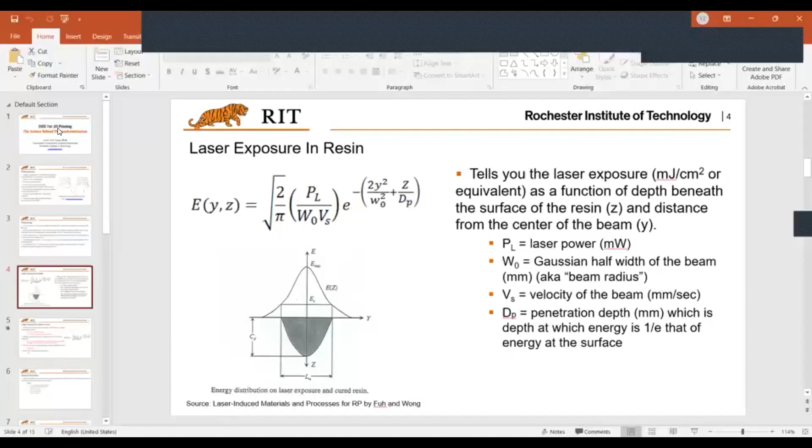So we talked about some of the fundamental chemistry beneath the photopolymerization process. What essentially happens during the process is the polymer becomes cross-linked after the light is applied to the resin during the process. That's a unique property. Basically, thermoplastics are not cross-linked, so thermoplastic material cannot be used in this process.

As I mentioned, this cross-linking happens during the process, and there has to be a light source. That is very important to look at in this photocuring reaction. Basically, that is the process of hardening a liquid resin through a laser or other light source selectively applied to the resin. There are a few parameters that need to be considered.

First is the penetration depth. Basically, that is the depth beneath the liquid surface at which the energy intensity has been reduced to approximately, actually it's 1 over the exponential number, I mean Euler's number, 1 over E. Here you can roughly use 1/3, since Euler's number is 2.7 something. But you should know it's actually Euler's number, 1 over E.

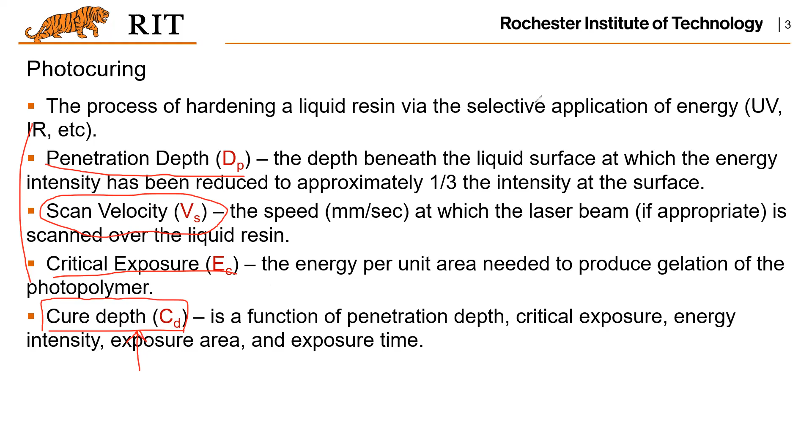Now we have this equation here, and basically PL is the laser power, and W0 is this Gaussian half width of the beam. As you can see here, that represents the beam radius. And this E(Y,Z) is the laser exposure. Basically, its unit is millijoule per square centimeter or some other equivalent unit.

But overall, it's the laser exposure. And this laser exposure is a function of the depth beneath the surface of the resin and the distance from the center of the beam. As you can see here, this can be considered the center of the beam, and you will have different energy at all these points. And also it depends on how close this point is from the surface of the resin.

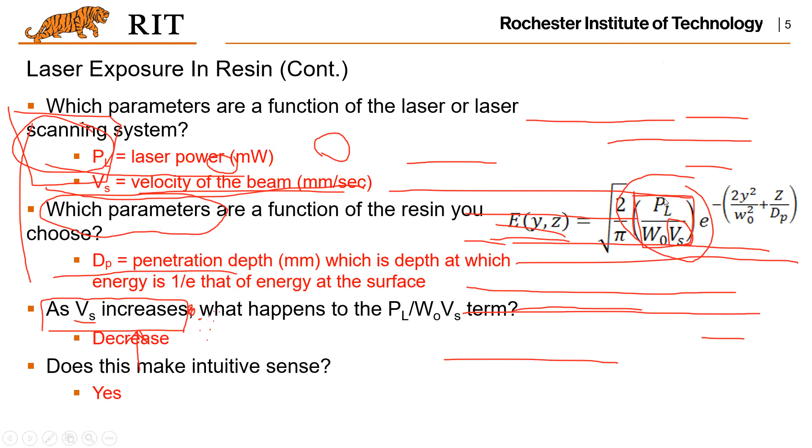Another interesting question is something like this: if we have all those parameters given, and there's a question asking what is the laser exposure, which is E(Y,Z), at a depth of 0.05 millimeter and a lateral distance of 0.03 millimeter from the center of the beam. That means, if you have the figure, that is the distance from that point to this vertical axis.

And with all this, how do you compute this laser exposure? What you want to do is first have the equation and plug in all these known variables, and then you should be able to find the laser exposure. For example, you have the laser power, right? That's where the laser power is placed. And also W0, VS, and DP. I think DP is something here, right? And so on, and it turns out you can compute the number like this. Basically, it's simply substituting the known parameters into the equation, and then you should be able to find out those numbers.

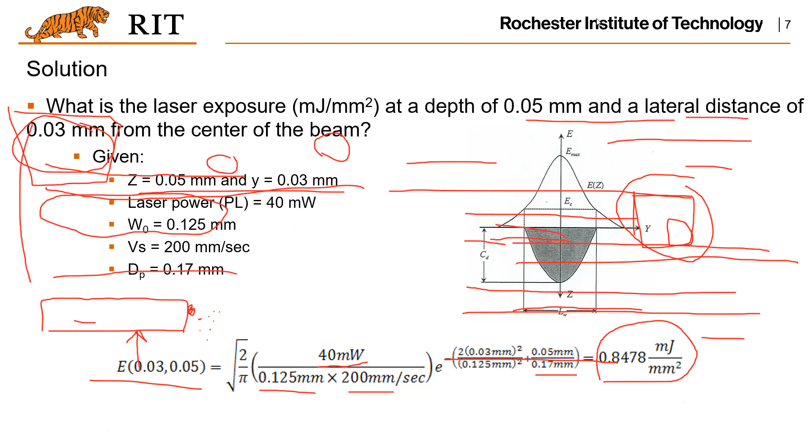Yeah, go ahead, I have a question. In the case of the supports, supposedly I understand - no? I don't know if it's correct, you can correct me. Can that energy intensity be manipulated? For example, if I need that my supports don't need to cure a lot, but my solid part, yes - is that the intention for this equation, or not?

Well, I think that's a good question. I don't know whether the providers of the printers manipulate the power, but that's possible. But one thing you want to be aware of is the support will still do the job - that means it supports the main part, and there will be a load applied to the support. If this curing is weaker than the one for the main part, whether it could bear the same amount of load without collapse, that will be the essential question you want to look at. Probably I think they will not afford this risk. So instead, they just use the same intensity, the same laser energy, and cure it as strong as the part. I think that's my guess - I didn't check it, but that's interesting to look at.

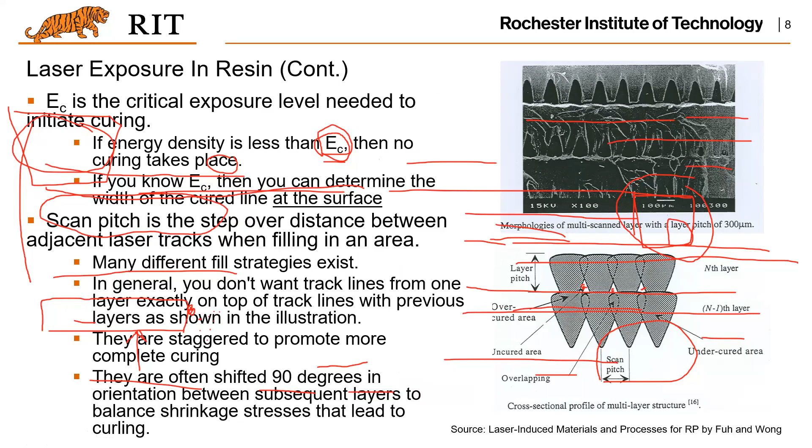If you know the critical exposure here, you could determine the width of the cured line at the surface. If we look at the figure... basically, if you know what is the critical exposure, you can tell what is the width of the cured region at the surface. So that could be computed.

All right, let's move on.

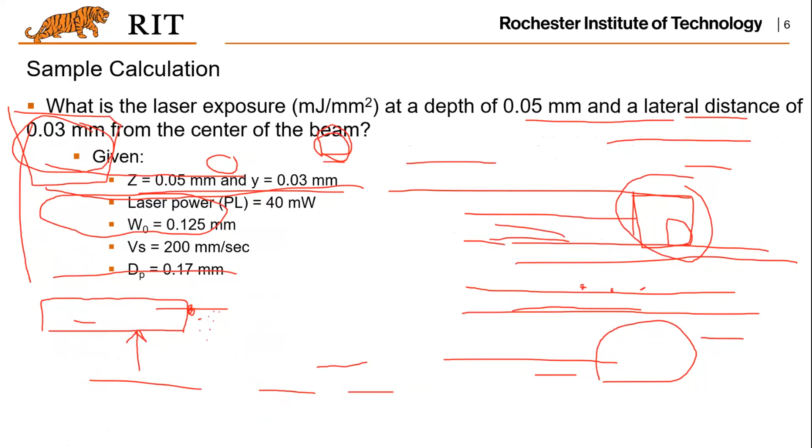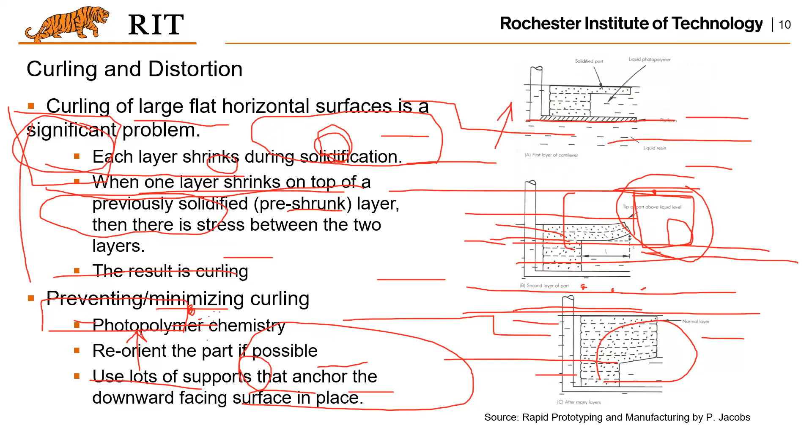Such curling could be removed, and also you could change your design a little bit to prevent designing such features on the geometry of your part. So all these are possible solutions for preventing the curling of your prints.

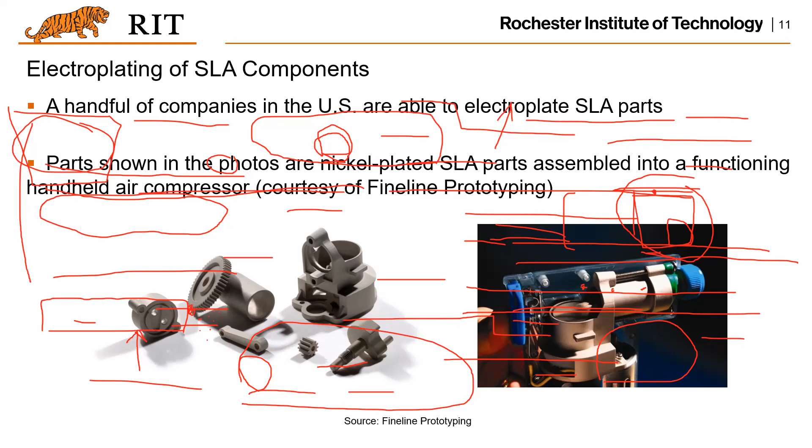For the printed parts, again, there are post-processings which could introduce other appearance and functions to the printed part. For example, like the electroplating process - basically, you could add on a thin layer of metal onto the polymer parts right after the process. Here shows some examples, and basically that will serve certain functions in certain applications.

I would like to skip this. Basically, those are the steps for the plating of the plastic.

For many of those electroplating processes, what you want to do is charge your plastic part and make it available for the metal particles with the electro charges applied, and then you can start with other steps to do the plating.

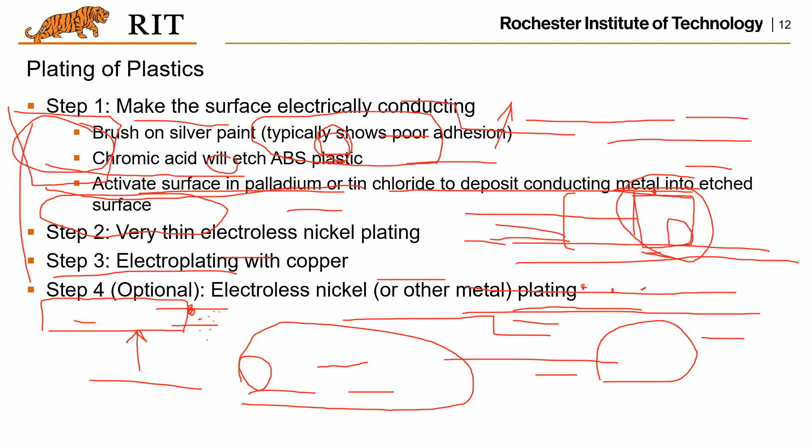Okay, another interesting application is Invisalign. I think I introduced this in the beginning of the class, and it's a very successful business based on the stereolithography process.

The key here is to create a series of teeth between the original teeth of the patient and the patient's desired teeth, with transitions in between, usually 12 to 48 aligners. Each aligner is worn for about 6 weeks, and all these aligners need to be fabricated first by 3D printing a model of the teeth, then thermoforming to generate the aligner based on the printed teeth.

The material is polycarbonate or polyurethane. Basically you want a very thin layer of this material, and at the same time its strength should be good enough for the purpose of aligning the teeth.

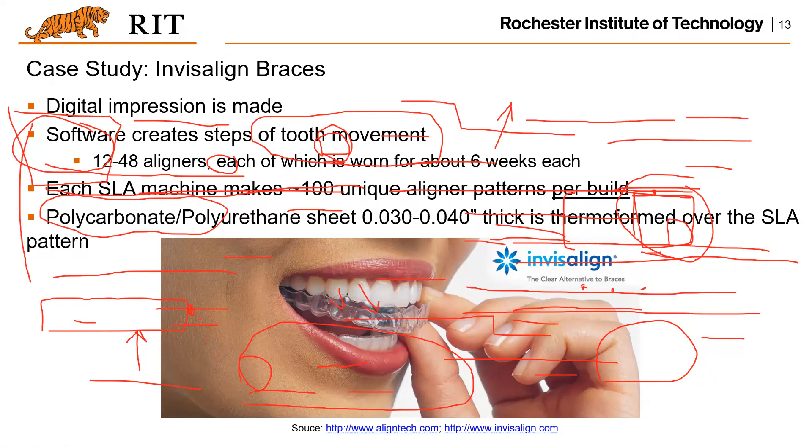Yeah, okay, I could show you how it looked like. I know it's a little annoying to have all those annotations on, but let me copy the link and open it in a different browser, just one second. Let me share this website instead so you won't have the annoying annotations.

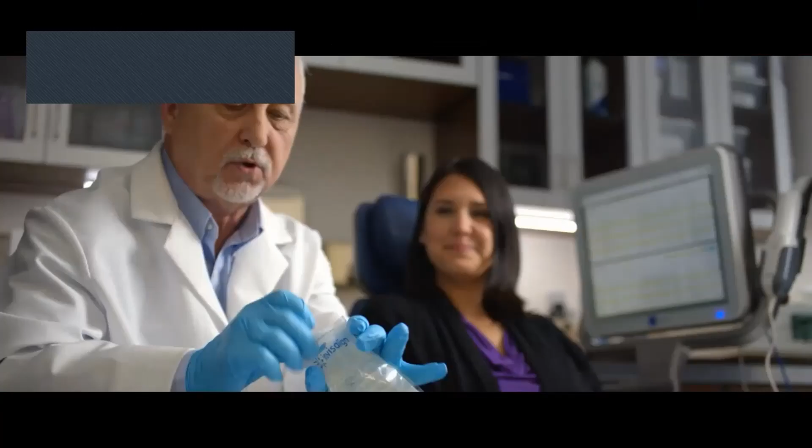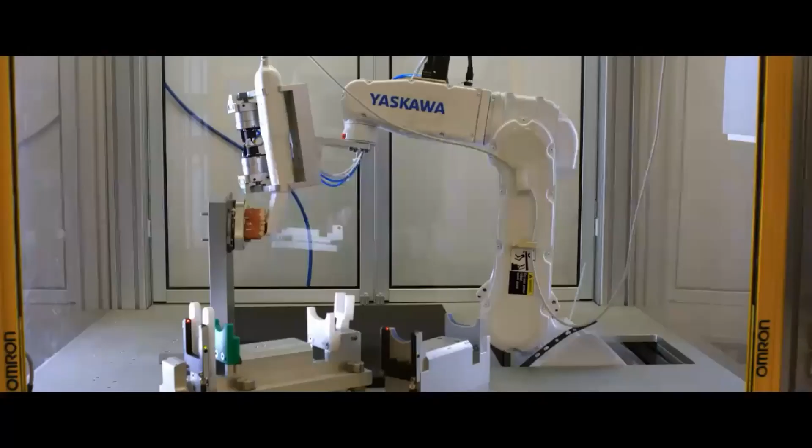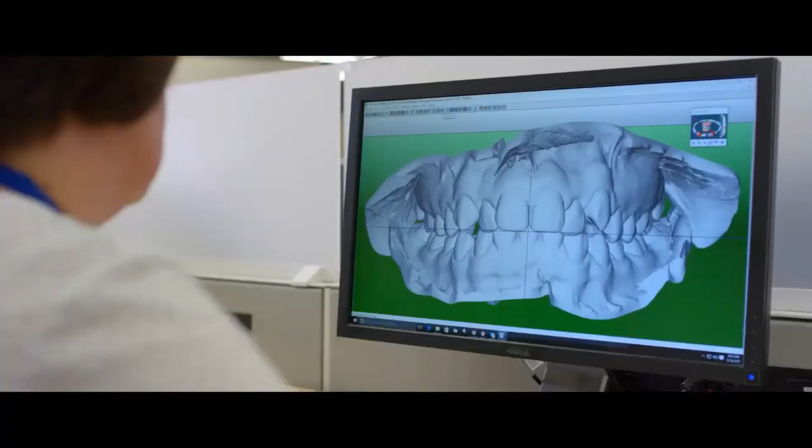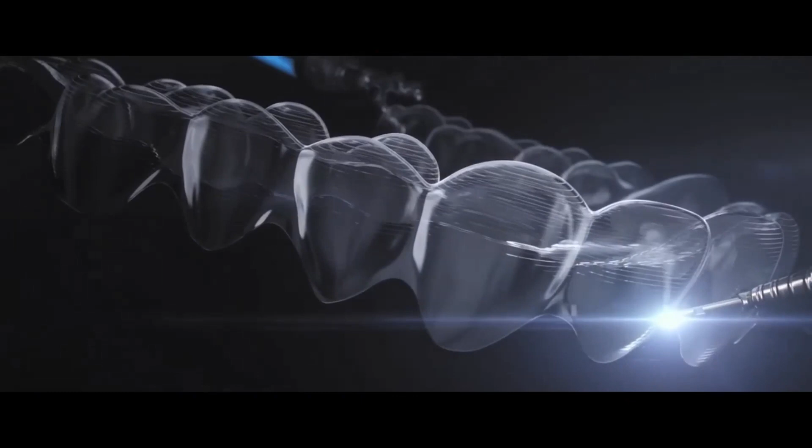The idea of mass customization is really the basis of the company's existence. The idea that sparked the whole thing was: can we use digital technologies to bring the science of teeth straightening into the next generation? When Invisalign started, 3D printing was primarily used for prototyping a limited number of parts, so we had to figure out how to make that into a production process. 3D printing is really the foundation of our manufacturing process - it's the starting point. When we make a mold for every stage of a patient's treatment, we use 3D printing to make those molds. Think about injection molding, where you're only producing the same type of part, millions of those - that's been done before. Or think about a specialty 3D printing application, where each part is unique but produced in small quantity. What we've done at Align is combine those two. We've treated almost 6 million patients, and growth is accelerating. We produce about 320,000 parts every day. 3D Systems has been instrumental in helping us get to where we are today. What makes Align's mass customization so unique is not only are we producing millions of parts every month, but each part we produce is unique. This is really, as far as I know, the only true example of mass production using 3D printing.

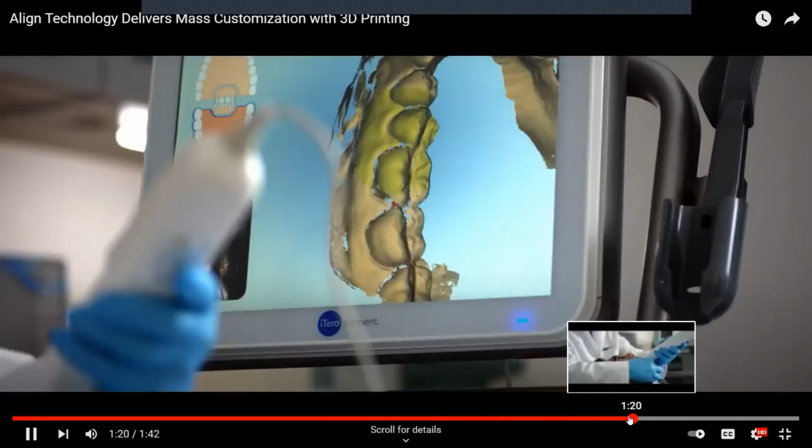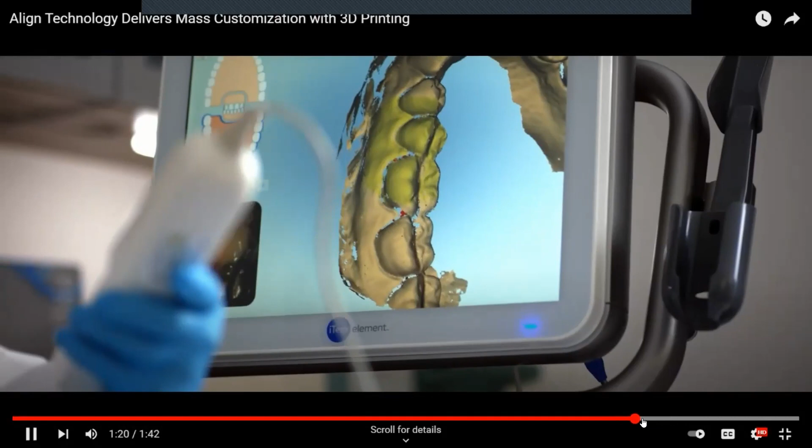I'm trying to find out where this was thermal formed, but apparently it didn't show in the video. So do you all know what thermal forming is, right, or not?

Yes, of course. How about others? No, not really. Okay, let me show you the thermal forming, what thermal forming does, so that you will understand what I'm talking about.

Thermal forming, like... but the problem is the video is confusing because they show it in a certain way - that's the marketing strategy. Yeah, that's why there are questions.

Oh, you are actually - let me see. Oh, it's a little off. Instead of finding the teeth application specifically, let me just find some general thermal forming examples. Okay, let's say this one. It's a little too long.

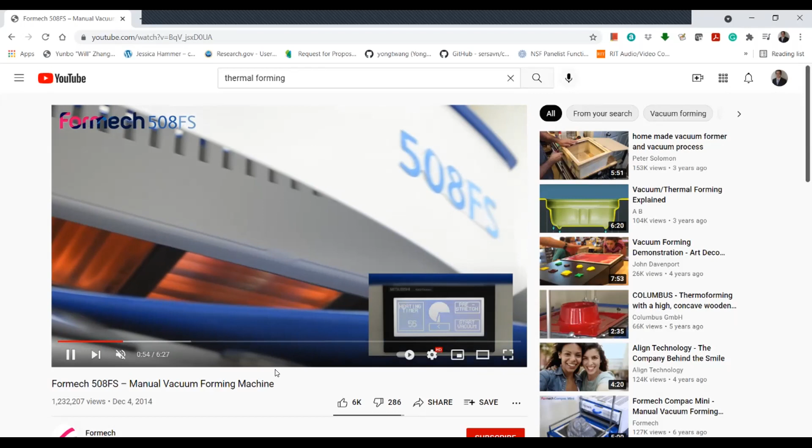All right, and then another step: the mold is moved towards the sheet, and there will be a vacuum machine to remove the air in between the sheet and the form. And it turns out you will have the part created. So basically, if you talk about plastic boxes for cookies that you will always see in the grocery stores, that is made using such a process. So you have the mold, you have the sheet, and through this process, you will have all the parts with the geometry created like this.

See, right? So in the Invisalign case, what it prints is the teeth as the mold, and then the polycarbonate plastic sheet will be fabricated and applied to the mold, just like this, to create a thin sheet of the aligner. You got it now? So just remember, it's not directly printing the aligner. It's the printing of the teeth and then a thermal forming to create the aligner.

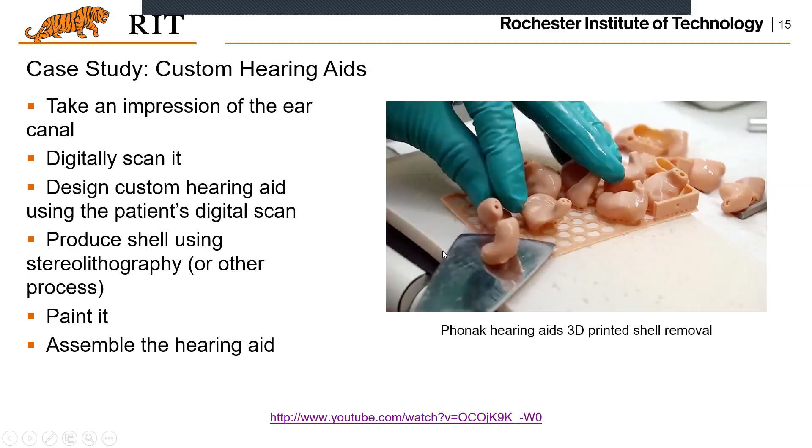Let's look at a video maybe. Just one second, let me share it.

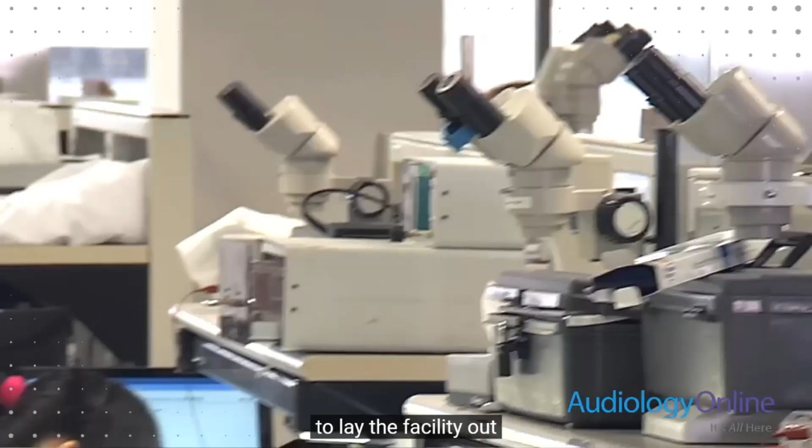Well, at Oticon, we've recently moved into a brand new 162,000 square foot facility. And the beauty is that we were able to do that and design it based on our 100 years of product design and manufacturing experience. So we were able to lay the facility out, taking advantage of that to optimize productivity and efficiency and really streamline the workflow. In addition, this expansion has allowed us growth for the future. We were able to put the infrastructure in place to keep pace with the growing demand. It also enabled us to increase and upgrade all of our manufacturing equipment.

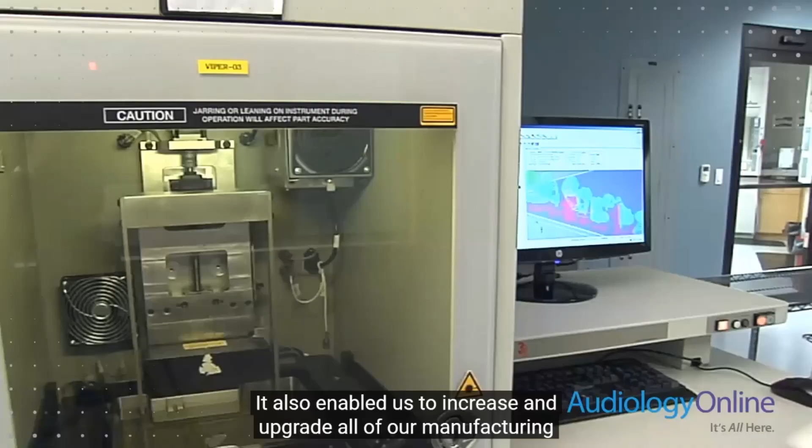And part of that manufacturing equipment consists of the SLA process. For those that don't know what SLA is, it's called stereolithography apparatus. It's kind of a tongue twister. But what it means is really a great ability to take advantage of new technology to create shells. We're able to double capacity and at the same time make a much more cosmetically attractive, smoother finish, comfortable fit product for the custom side of the business.

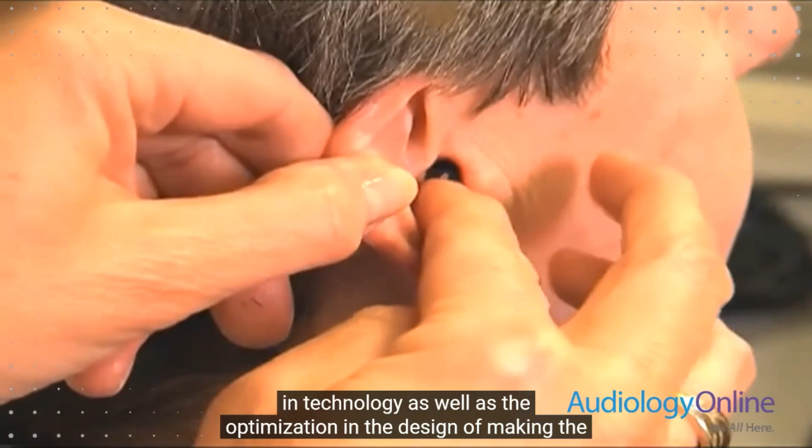Oticon produces a variety of BTE instruments and custom instruments to the marketplace. With the introduction of the Invisible in the Canal product Agil, there is a growing custom product demand out there. With today's advances in technology, as well as the optimization in the design of making the product, we can make it smaller, comfortable fit, and the hearing care professional can fit a wide variety of hearing losses.

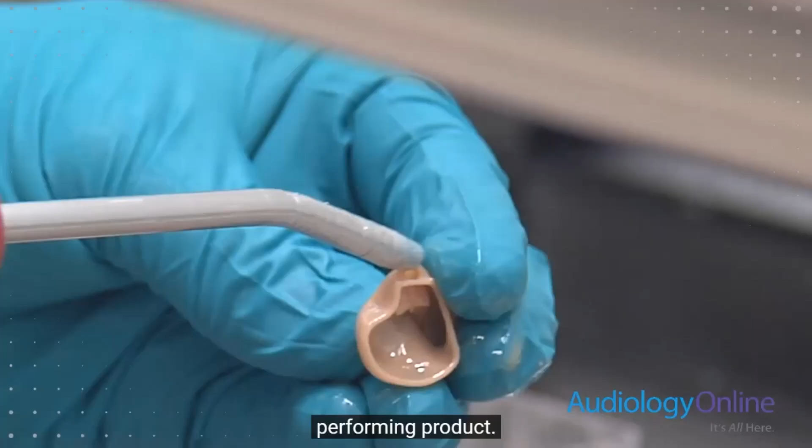And it goes beyond technology. Just because you have technology will not ensure you have a good performing product. It takes people, and people are a key foundation within Oticon. So it's a combination of the technology and how to use it, using the people, using their understanding of what's important to make a good product. Put those two together, that's called success. I think it's important for the hearing care professional to understand, with this new technology, they still have a key role to play in the quality of the impression that they provide.

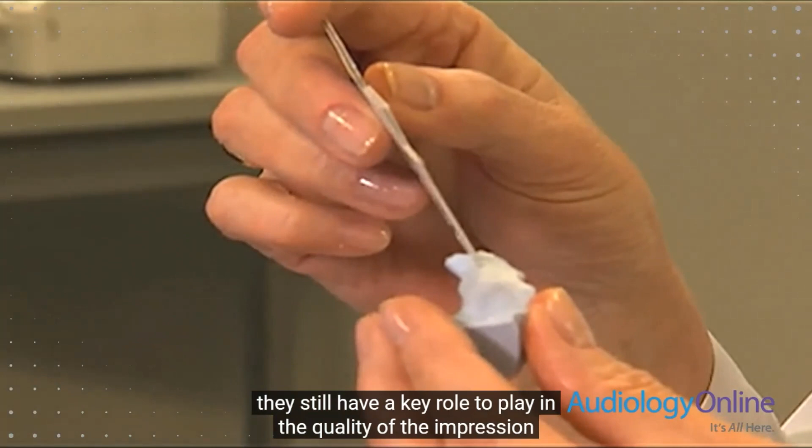What does it take to make a good quality product from an impression? It's really fairly simple - it's about consistency. When an impression comes in, does it go beyond the second bend? Ideally 2 millimeters beyond the second bend, full canal. Use that otoblock so we can get a full, good size impression including the concha, because the concha is also very important for a manufacturer since that determines our locking points.

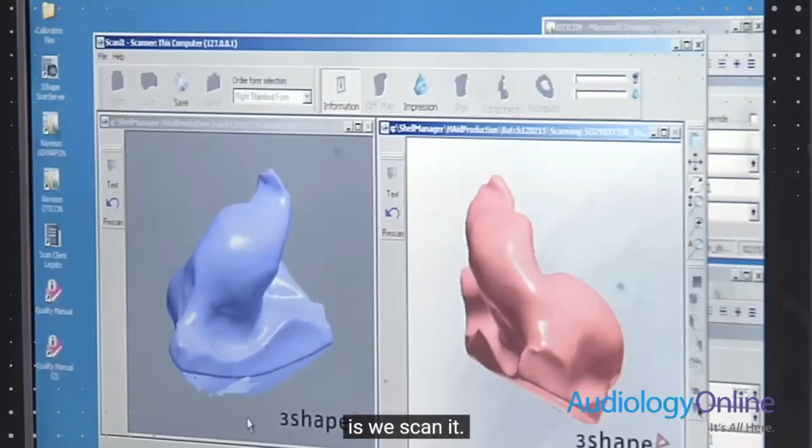Once we get that impression, the process we go through is we scan it. When I say scan, through 2 cameras we make what's called a digital point cloud - roughly 100,000 measurements in 2 to 3 minutes. So we create an exact replica of the impression that we get in. After scanning, we create a 3D image of that impression, again an exact replica.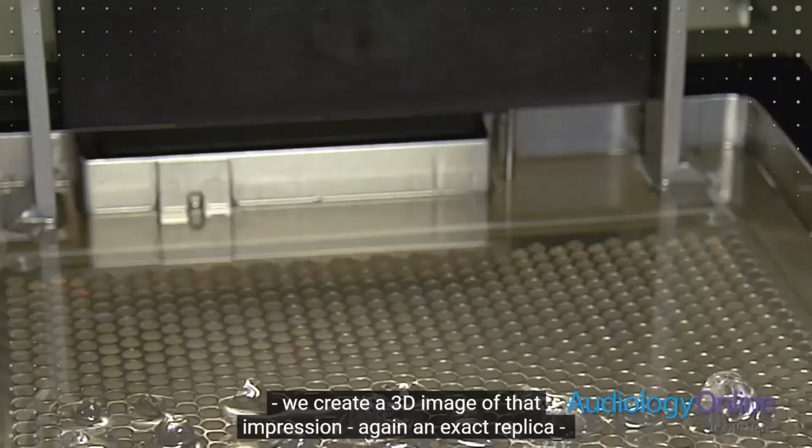Now we print it, using new technology. That new technology makes it very consistent - we can have a very consistent product. So again, it's incumbent that we get a good quality impression.

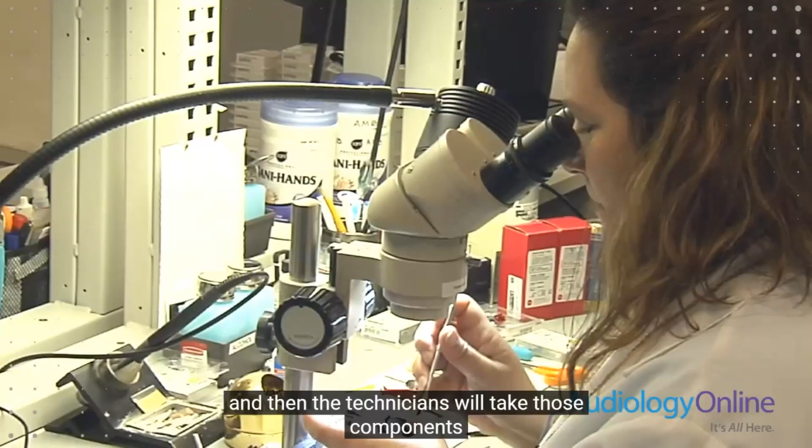If we have that, it goes through the process of shell making, it goes to our assembly floor, and then the technicians will take those components and put them into the product for something that's consistent, comfortable, and as small a size as possible. So hopefully when you open that box, when you get that delivery, not only are you happy, but your patient will be happy as well. The question that comes up is what happens if we don't have a good impression?

I think we can stop here, but that video presents how this kind of stereolithography process helps the manufacturing of hearing aids.

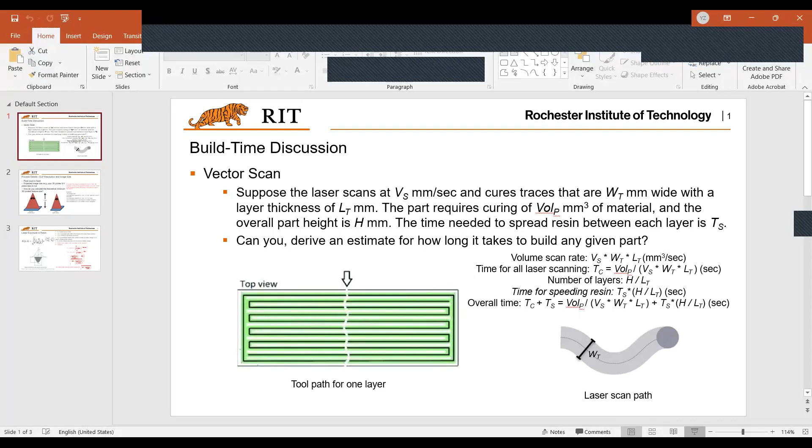One question is related to vector scan based stereolithography. Let's assume the laser scan has a VS millimeter per second velocity, the cure trace has a WT width, and the layer thickness is LT millimeter. We are required to cure this volume of material, and the overall part height is H millimeter. Let's estimate what the overall building time will be. By the way, there is a time TS required between each of the layers. Knowing all this, let's estimate the overall time used for building the part.

I've talked about this a little bit during the class. There are two sets of time: one is the laser scanning time, and the other is the time for spreading the resin, which is what TS represents - the time for spreading the resin between the two layers. We need to compute both sets of time and put them together.

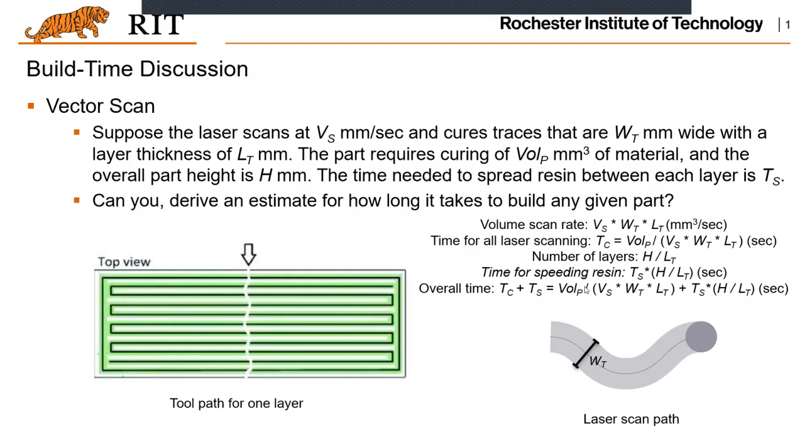Another one I mentioned a little bit during the lectures, I mean 2 weeks ago - that is, if you have the projection-based image for the projection-based process with the image resolution, you could decide what the minimum 3D printed feature size is.

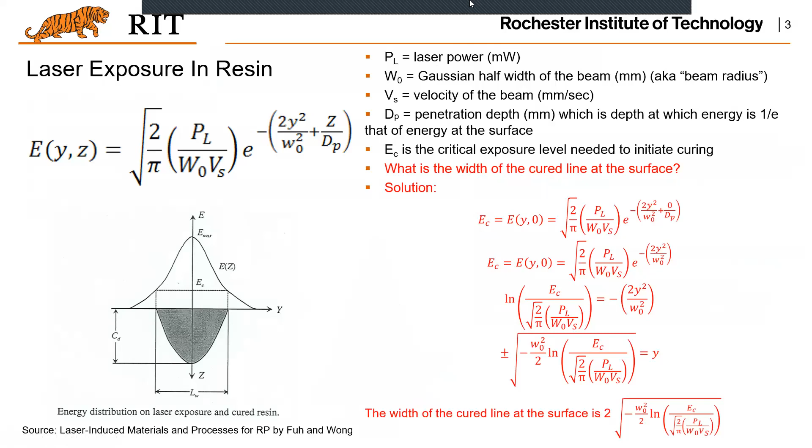All right, then we have this kind of question, basically that's related to the laser exposure in the resin. And the key is this equation, that is the Gaussian equation you want to use. Let me move it somewhere, maybe here. And again, it depends on what kind of known information you will have.

For example, there's one question to compute the width of the cured line at the surface. So that is asking you to find the dimension of this. It turns out it happens at the surface, that means the z number is 0, because this axis is y and this axis is z, and at the surface the z should be 0.

Then what you could do is substitute 0 here, and now you have what is the laser exposure, and then you will have this number. Okay, all right.

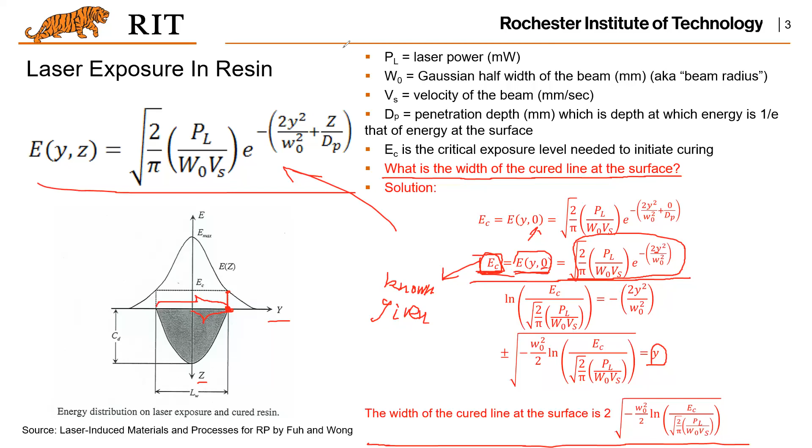Okay, I think we can move on and talk about another process, just a start. All right, that's lecture 9.

So let's talk about the selective laser sintering process. So what it looked like, let's check the video.

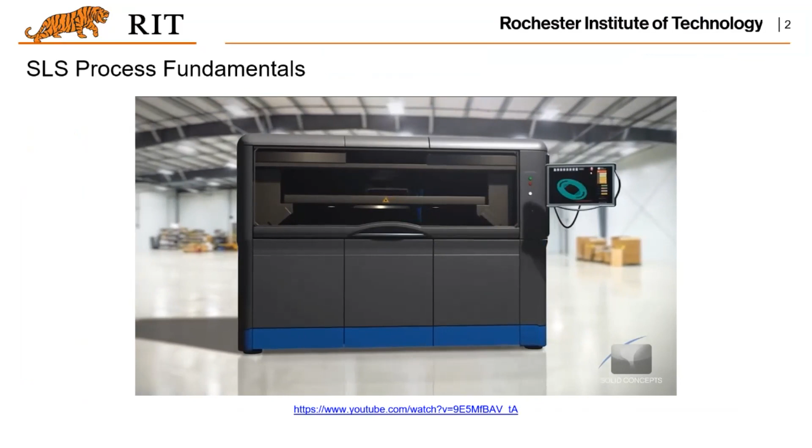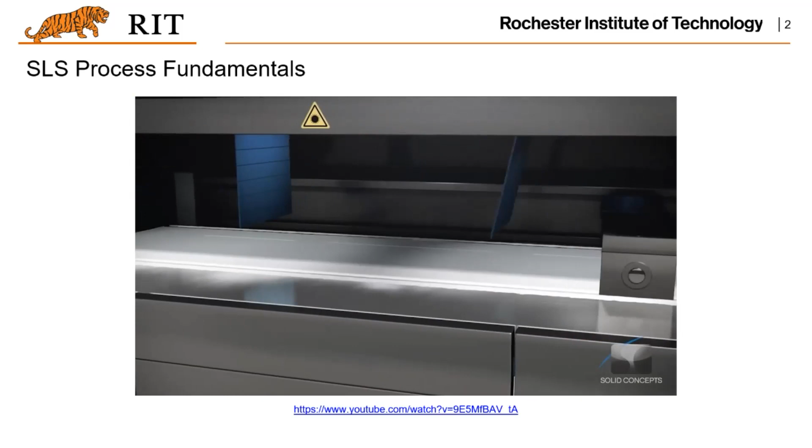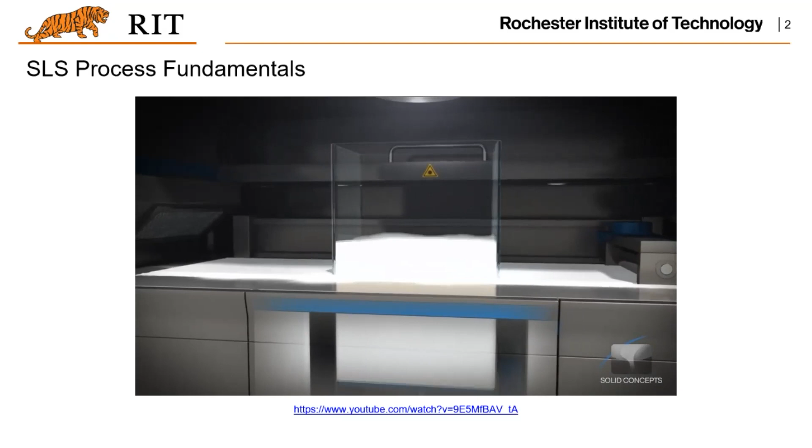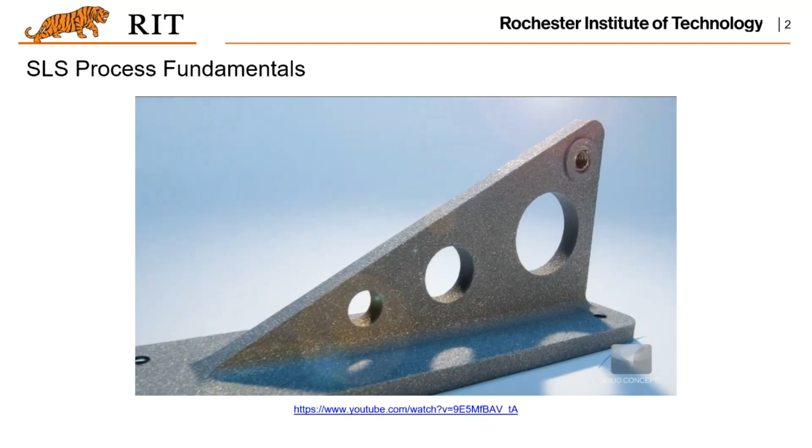Selective laser sintering, or SLS, is a rapid prototyping technology that turns 3D CAD data into physical parts in a matter of hours. SLS is an additive manufacturing technology that uses powdered nylon 11, nylon 12, and PEEK materials. Parts produced are lightweight, highly durable, and both heat and chemical resistant, making SLS an excellent choice for producing production parts without the expense of tooling. The SLS process begins by splitting 3D CAD data into thin cross-sections or layers. The data is then transferred to the SLS additive manufacturing equipment. The machine then begins to create the first layer. After a leveling roller spreads a thin layer of powdered material across the powder bed, a CO2 laser traces the cross-section on the material. As the laser scans the surface, material is heated and fused together. Once a single layer is complete, the powder bed is lowered to make room for the next layer. More material is introduced from the powder cartridge and rolled out smooth, while unused material is recycled. The process is repeated, building layer upon layer until the part is complete. As SLS parts are built, they are encompassed by unsintered powder, which provides supplemental strength and eliminates the need for support structures. Complex designs and assemblies, once thought impossible, are now being redesigned with SLS as cost-effective integrated structures. Solid Concepts manufactures parts utilizing nylon with property-enhancing fillers to create rugged SLS parts suitable for a variety of prototype and production applications. Typical uses for SLS include tools and fixtures, fuel tanks, flight-rated components for unmanned aerial vehicles, automotive designs, air ducts, architectural models, and artistic sculptures.

All right, as you can see from the video, the SLS process consists of several key points. Essentially it hardens the powder, plastic powder, through selective laser energy.

And there's a roller which will spread a thin layer of thermoplastic powder onto the newly built part. Then the platform will move downward and repeat this scanning, hardening, and spreading of material, and lowering the platform again and again until the part is built.

So there's a unique point for this process: since during the building of the model, the object is buried in the plastic powder throughout the whole process, that means it does not require support material, right? Because the unsintered powder will support the build part. So that's a unique point for this process.

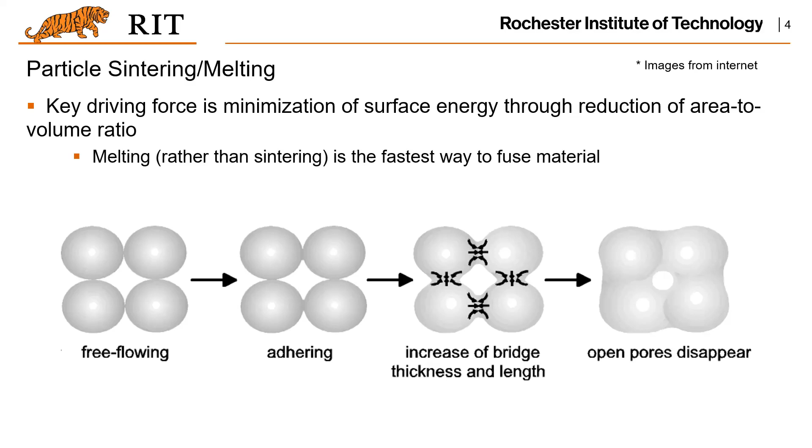There are different powder consolidation methods. There's solid state sintering, where there's basically no melting at all. And there are liquid phase ones, where of the two components, one melts and the other doesn't, or partially melts, so the bulk of the particle does not melt, just the skin melts. Or they are fully melting, which creates higher density, close to a full density process. If you fuse the particles more and more, that requires more energy, higher temperature, more strict processing conditions. So it depends on the material and the function you want the part to serve, and you could choose different ways for melting or sintering.

Since it's also a laser-based process, it has similar parameters. First is the laser power and spot size, scanning speed, which is quite similar to stereolithography. And there is hatch spacing, which represents the spacing between different scanned tracks, and layer thickness.

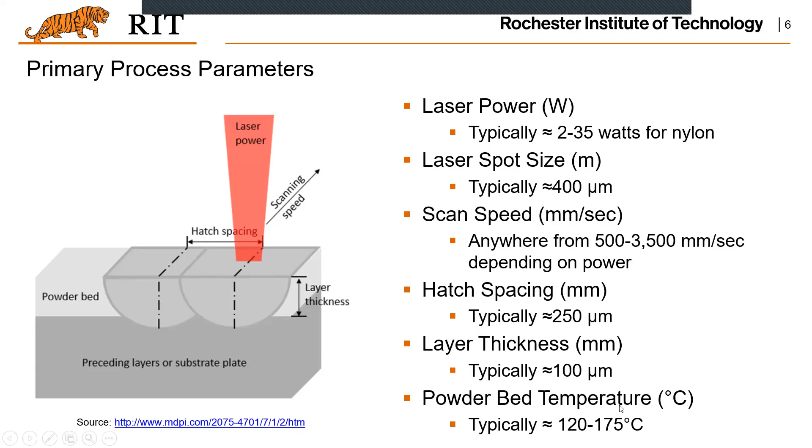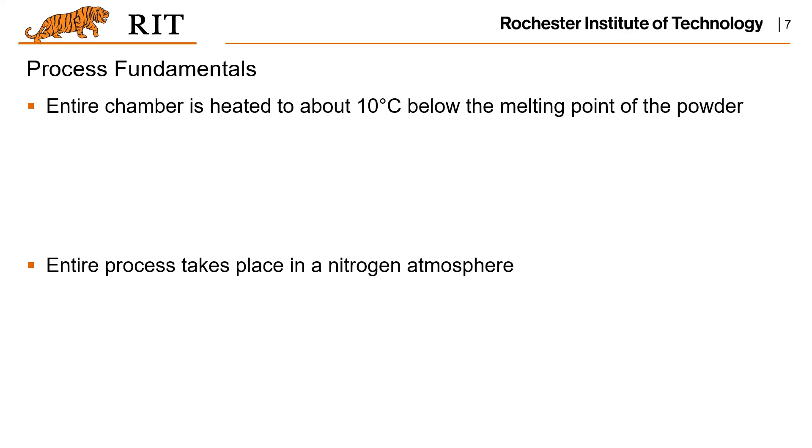During the process, the powder bed will be heated up to a certain temperature. Usually the entire chamber of the machine will be heated to about 10 degrees Celsius below the melting point of the powder. The reason is that this increases the laser scan speed. Basically, if the powder temperature is much lower than the melting point, it will consume more energy to be melted, so the laser has to be very slow to melt the powder. By heating up the chamber, that increases the scanning speed.

Another benefit is from the material property perspective: because the temperature difference is small, the built part will have less residual stress. So in order to reduce such residual stress, it is desired to heat up the whole part to a certain temperature, which is 10 degrees Celsius below the melting point.

Also, another requirement is a nitrogen atmosphere that will be filled in the chamber. The reason is, without such a nitrogen atmosphere, there could be some oxidation during the process for the nylon powder used. So to reduce such oxidation, the nitrogen atmosphere must be filled.

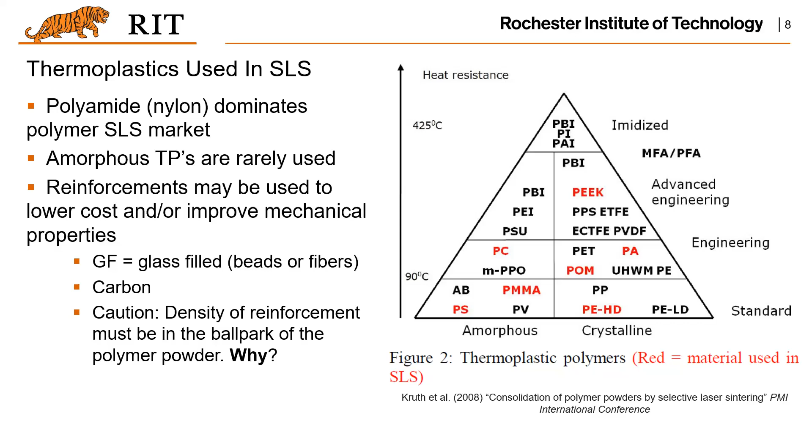So again, for the thermal process, we need to look at the temperature. For semi-crystalline or crystalline thermoplastics, there is a glass transition temperature, usually around or below room temperature. There will be a distinct melting point and subsequent flowing of material, and also a significant change in volume above the melting temperature. But for amorphous thermoplastics, there's no clear melting point.

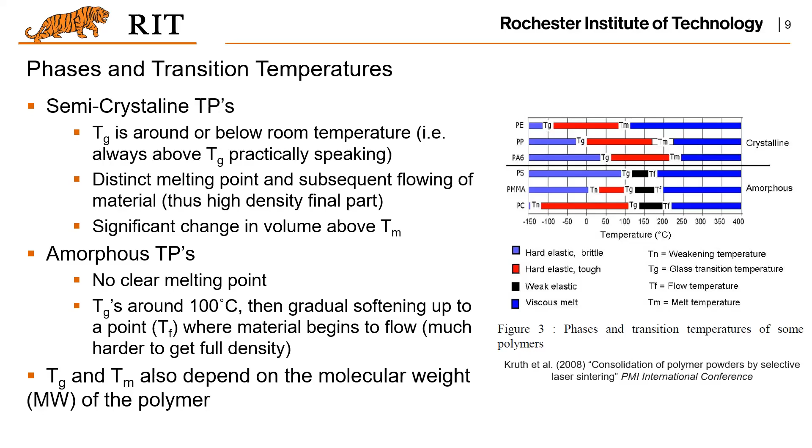The glass transition temperature for amorphous thermoplastics is around 100 degrees. It will gradually soften to another level where the material begins to flow, which is undesired for the printing process, since there's no clear melting point. That's hard to plan your process and build other parameters around. So that's another fundamental reason why crystalline or semi-crystalline thermoplastics are more desired in the process.

We have some equipment to measure thermal energy, like differential scanning calorimetry, DSC equipment, which measures the amount of heat needed to raise a certain amount of material to a certain temperature. By doing so, you have a clear understanding of the temperature and related thermal energy required, as shown by the curve at each point - the critical temperatures, like the melting point and glass transition temperature, and how much heat energy is required.

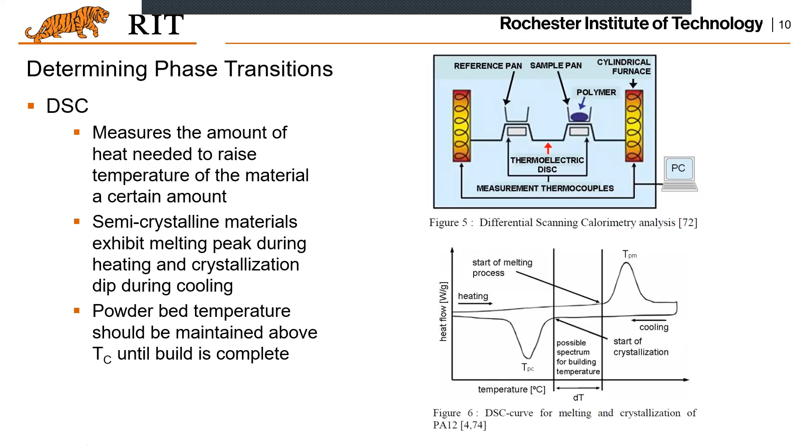In this process, the ideal polymer should have a narrow melting range, so it can go from no powder melting to complete melting within just a small increase in temperature. That makes this process easier to control - you just heat up the material a small amount to raise the temperature, and then complete the melting process. That's why we prefer PA12 over PA6 nylon material - looking at the melting range, the upper one is smaller compared to this one in this case.

Another phenomenon during the process is crystallization. The rate of polymer crystallization is at a minimum near the melting temperature and at a maximum in between the glass transition temperature and the melting temperature. That is related to the solidification process.

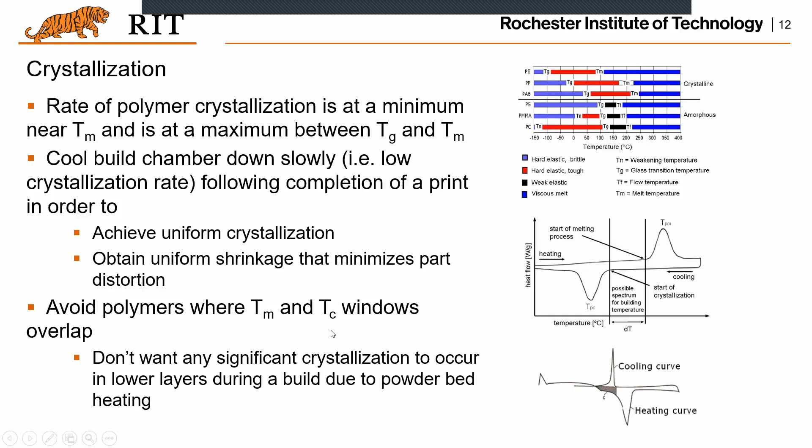Oh, it's not a glass transition window, it's the crystallization temperature.

Another one is the melt viscosity. After the material is heated up, it becomes a liquid state, and the viscosity of the polymer should be low enough to flow out to full density before the temperature falls below the melting point. That is related to the material itself, and low melt viscosity tends to produce high shrinkage, and essentially it will cause low part accuracy.

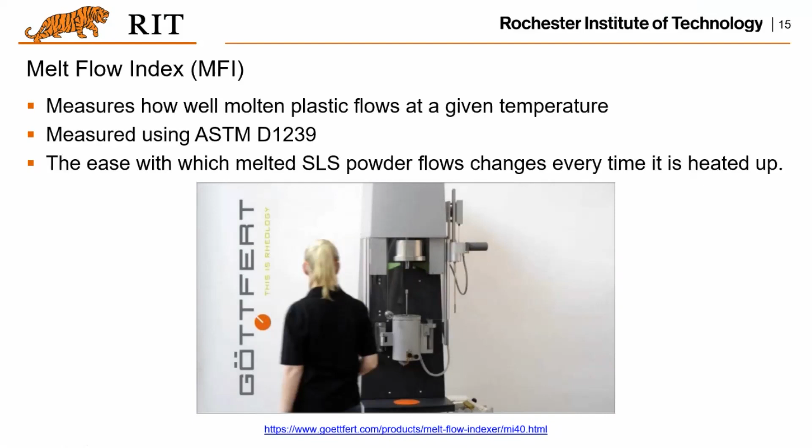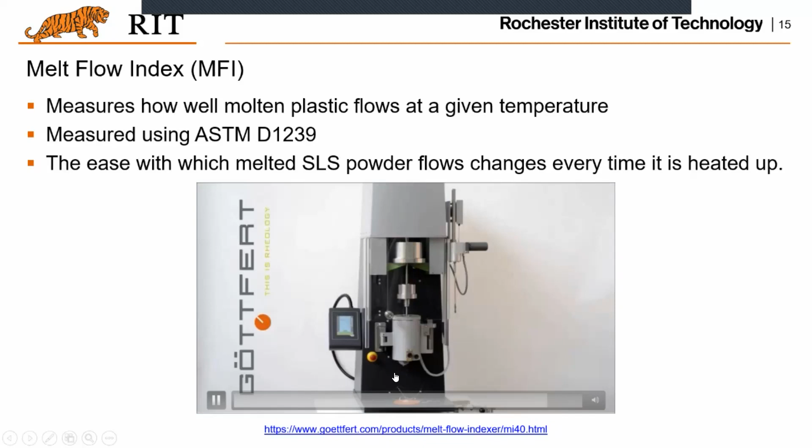So there is a way to determine the melting flow velocity if we conduct such a test. This is the melt flow index testing, measured using ASTM D1239. As you can see here, we have the pellet of the plastic, and it will be heated up in this device, then it will measure the molten plastic flows by setting up a certain temperature. At the bottom, it flows through small holes, and all the parameters will be recorded accordingly.

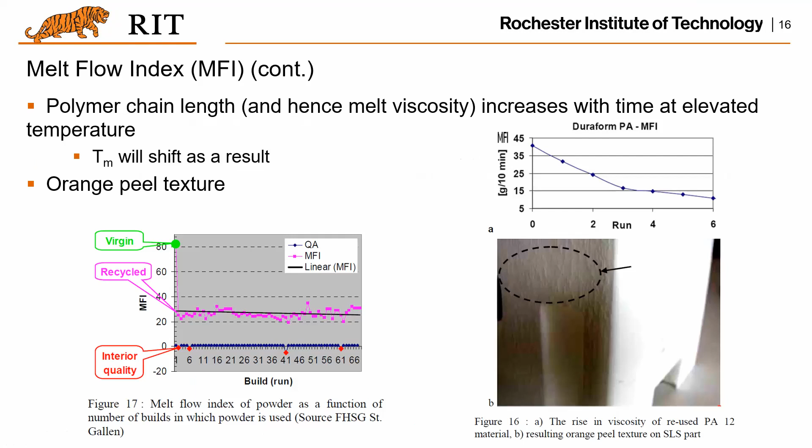So basically, the polymer chain length will increase with time at an elevated temperature, and that will cause a different melting flow velocity.

Another interesting property you want to look at is powder reuse and recycling. As you saw in the video, only a portion of the plastic powder is used, solidified during the process, and all the rest is still in powder form. So you cannot just dump all the remaining powders. Instead, we should think of ways to reuse them.

But the problem is that after the heating of the whole powder and the environment, the material property degrades, mechanical property degrades as well. So in order to reuse those powders on one hand, and on the other hand maintain high quality of the printed parts, we mix the different powders: one third new powder, one third powder from the overflow bins, and one third used powder from the build chamber.

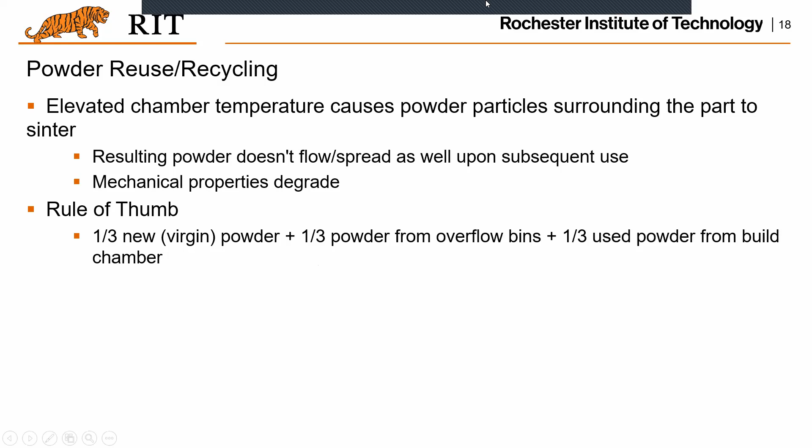So you might ask, what is the overflow bin? Let's go back to a figure. Basically, when the roller spreads material, there could be some excess powder falling down from the platform, so there will be a bin over here, I think on both sides, for this kind of remaining powder. This is different from the powder still on the platform. So one third of this, one third new, and one third from here—that's the three portions of the powder.

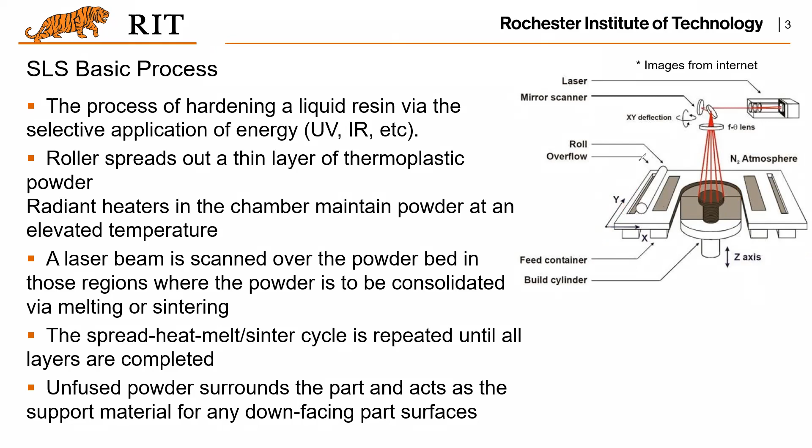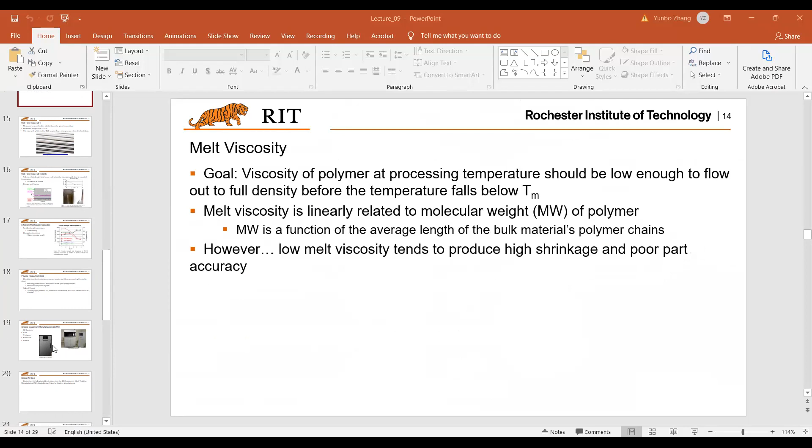Some of the manufacturers of the printers are 3D Systems, EOS, Prodways, Formlabs, and Sintratec. We have a Sintratec selective laser sintering machine in the lab, but for a long time we haven't operated it because it's not good to use—it's very difficult to use, and on the other hand, you don't want to get exposed to a powder environment. So we just let it sit there instead of utilizing it. But there are big ones in the AMPrint Center which are in use.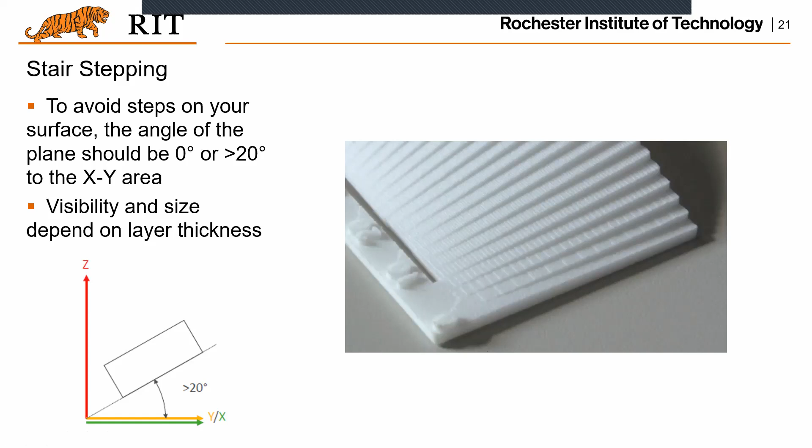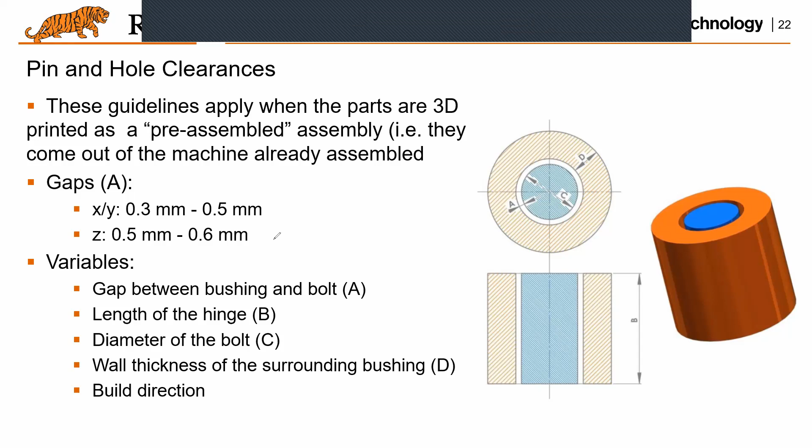So there are pins and holes for some of the parts, and there are smallest holes or pins that could be printed using such a process. These numbers are very important. What is the smallest gap in between the X and Y direction will constrain the feature or the size of pins and holes.

Also some variables: gap between the bush and the bolts, length of hinge, diameter of the bolt, wall thickness of a surrounding bushing, and build direction. This will affect your decision according to the different geometry. There's no unified guideline. You have to have a little trial and error to learn from experience.

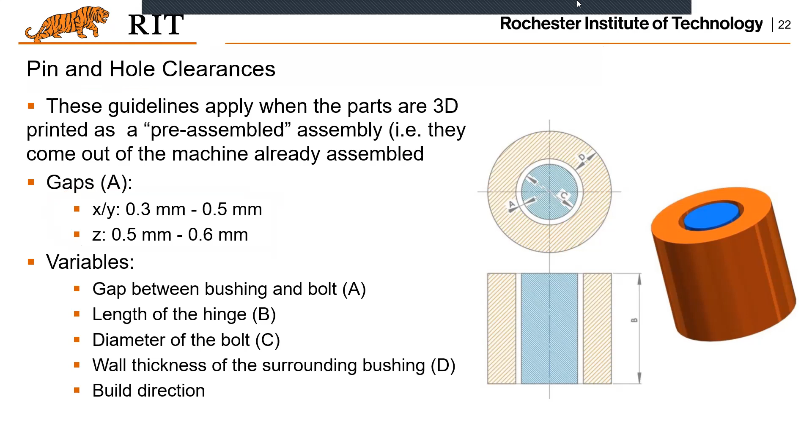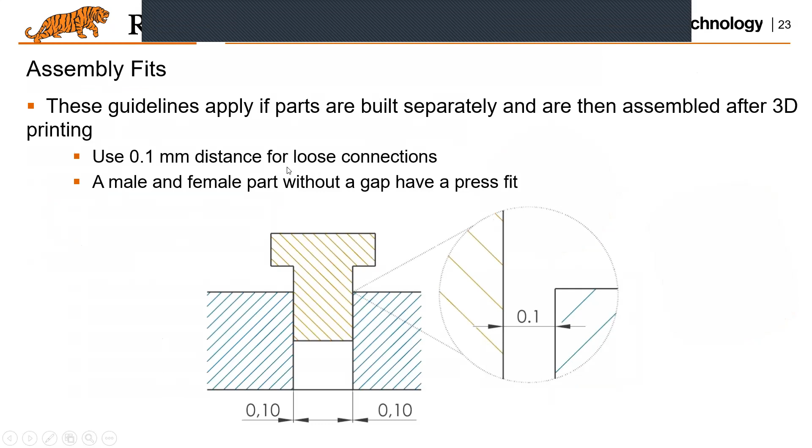For example, if you look at the fits, there is different fits. If you're talking about loose connections, 0.1 millimeter difference between the pin and the holes would be good practice. If you're talking about tight fits, this distance will be reduced according to how tight you want the assembly fit to be.

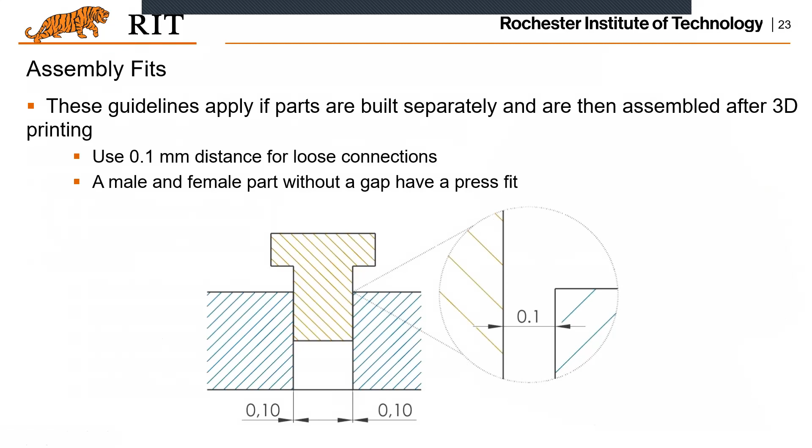Some of the minimum feature sizes: the wall thickness in X, Y, and Z. As you can see here, in the XY the minimal wall thickness is 0.45 to 0.7 millimeter. In the Z direction, the wall thickness for one layer is 0.1 or 0.15, depending on the machine and the different system you're using.

For the pins, minimum pin diameter is 0.8 millimeter, but usually this is an ideal case. In order to increase the repeatability, 1.8 millimeter would be a better practice.

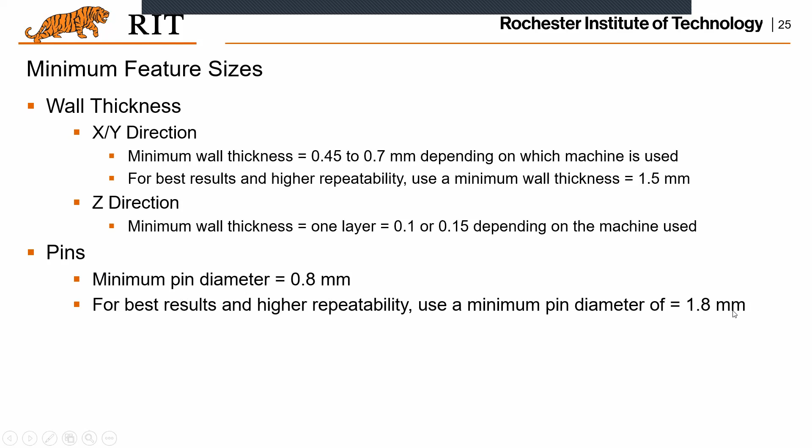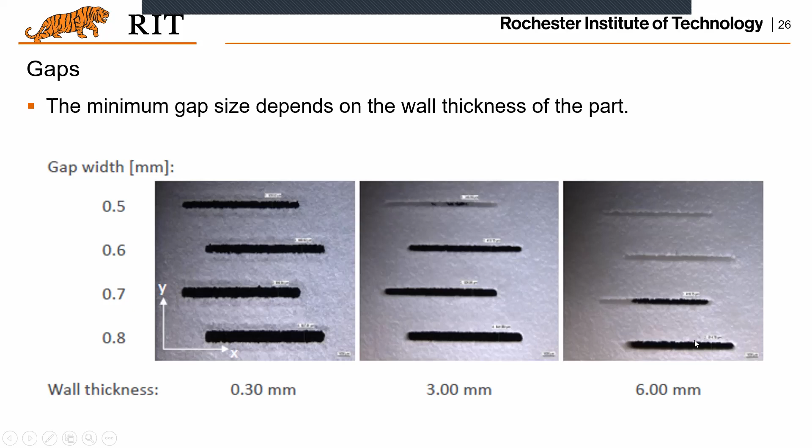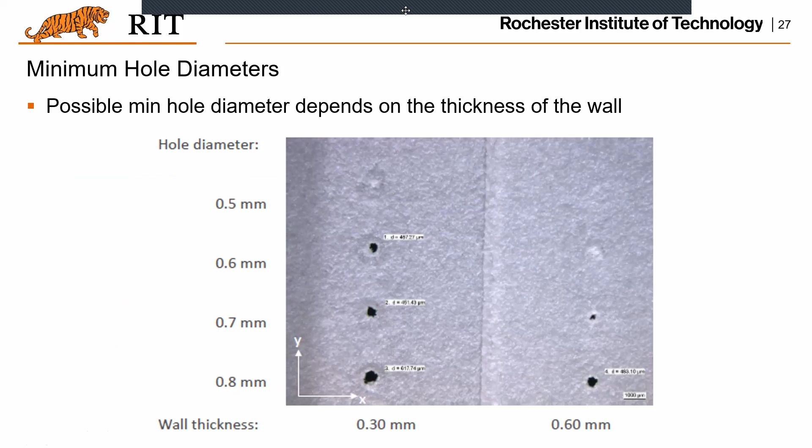So you can see if you decrease or increase the gap width, what it will look like for the prints. Same thing happens if you are decreasing the hole diameters, and it turns out there will be some failure starting from like 0.8 millimeter.

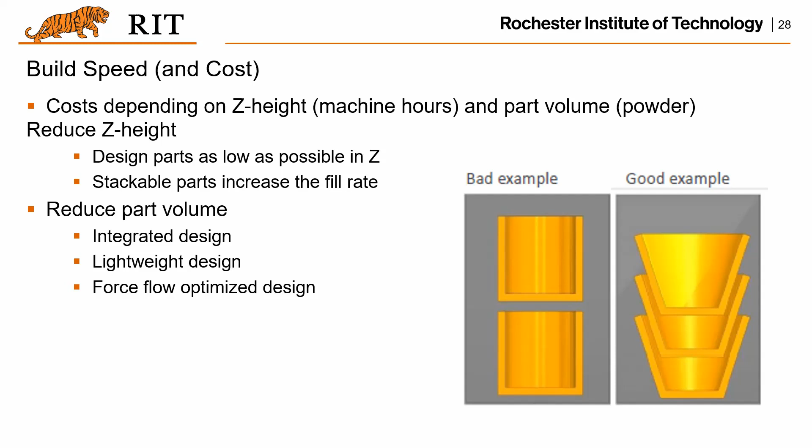Actually that is a similar problem for the stereolithography process. In stereolithography, if you are not aware of your design, there could be cases where the liquid material is trapped in a volume. That happens if you do not have an opening. That is the exact same case as what we have for the powder-based ones. If we do not have an opening to let the powder go out, there could be some powder remaining in your part, in those internal spaces of your part.